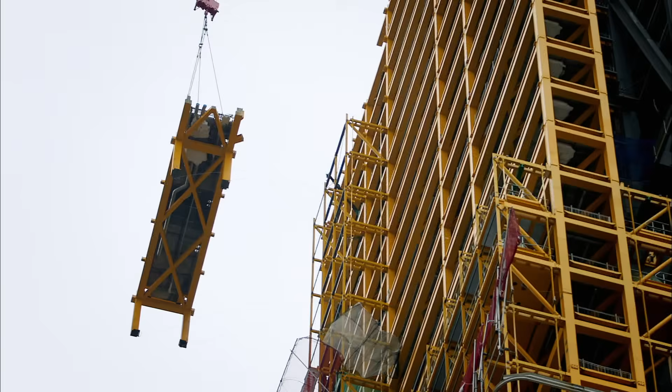In the heart of historic London, a brand new type of building is taking shape. A unique set of challenges has given rise to a world first. A prefabricated skyscraper, assembled by a tiny crew in an impossibly small space. On a super-fast schedule where every hour is accounted for months into the future.

Nothing like this has ever been attempted, but if they can pull it off, it could change the way we build forever. This is the inside story of the world's most cutting-edge and ambitious construction project. It is the Leadenhall Building, and it is a super skyscraper.

London has been building high-rises for almost 1,000 years. It began in 1066 with the Tower of London, built to intimidate the locals. It rose 90 feet and became Britain's first multi-story stone structure. St. Paul's, at least the fourth cathedral to stand on this site, reached 365 feet, more than 3 centuries ago.

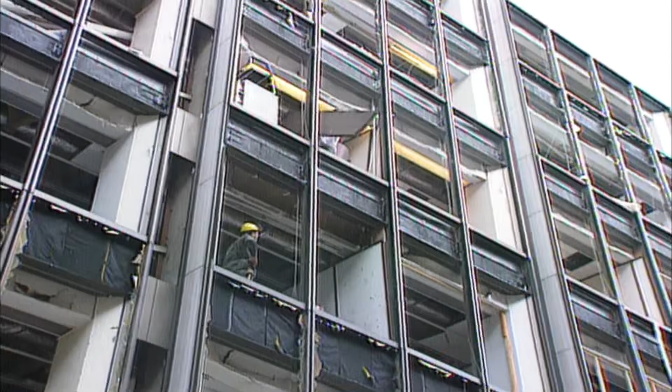The city has always understood high-rise and always understood that high-rise was the way of showing your strength and your success by marking your skyline. After the air raids of the Second World War and terrorist attacks in the 1980s and 90s, which caused more than $1 billion worth of damage, as well as through successive financial booms, which each produced their own monuments, London has seen a constant cycle of construction, demolition, and reconstruction.

The greatest constant in London's history has been change. As Chief Planner for the City of London, I'm responsible for 2,000 years of history. This is the point where people have been trading for 2,000 years. I expect it to be the point where they will be trading for another 2,000.

Now, a new kind of skyscraper is rising. The Leadenhall Building. Its distinctive triangular shape has already earned it a nickname: the cheese grater. The people behind it believe it will change the way we build.

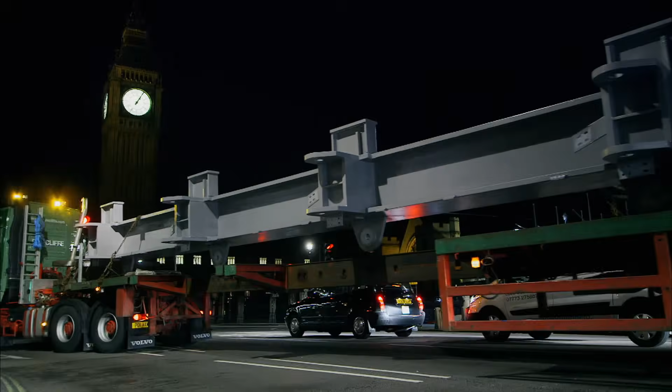It's 2 a.m. on a Friday morning in May 2012. While the city sleeps, 2 gigantic trucks make their way through the streets of London. They're carrying pieces of steel, 90 feet long and weighing more than 40 tons each. They travel by night, otherwise they'd bring daytime traffic to a standstill.

We've got 2 long heavy columns that have come under special transport movement order by the police. We're running late because the police didn't pick them up till, I think, 1:30, 1:45. When in position, these supersized pieces of steel will become part of a unique structure. London's newest skyscraper, the Leadenhall Building.

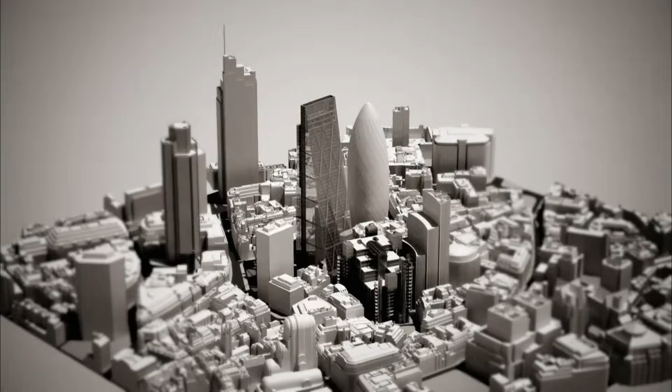736 feet tall, 52 stories. It will wrap a 20,000-ton steel frame in 75,000 square feet of glass. The Leadenhall Building won't break any height records, but what makes it unique is the revolutionary way it's being built. Prefabricated off-site and assembled in the tightest of spaces. It's a totally new way of building big.

The construction site is right in the heart of cramped, historic London, and that's what gives the builders their greatest challenge. The area they have to work in is tiny, just 10 feet wider than the building's footprint. If these columns don't go up tonight, there's nowhere to store them. It's a London job. You're a foot from the buildings like that, so you're building out of your boots, as I call it. But yeah, you'd normally have perhaps a bit more room.

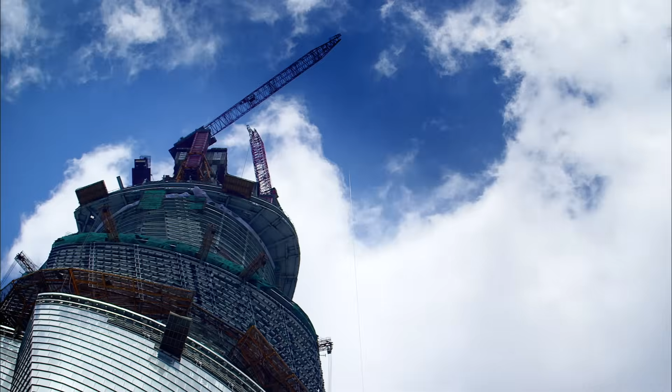What this means is that the Leadenhall Building can't be built like other skyscrapers. In the last 30 years, most tall buildings have been constructed using a concrete core. It's a design that produces great stability, but it also demands a serious amount of space. That's space to mix on site or accommodate a fleet of concrete trucks, and space for a massive workforce. Since at Leadenhall, none of that is possible, the building's designers hit upon two groundbreaking ideas.

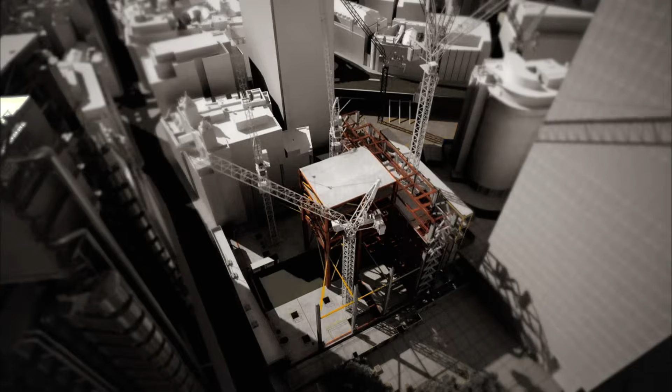The first requires getting rid of the concrete and replacing it with steel. The only concrete you'll find in the Leadenhall Building is in the floors. Instead of having a massive central core, they planned a steel exoskeleton that would sit outside the building.

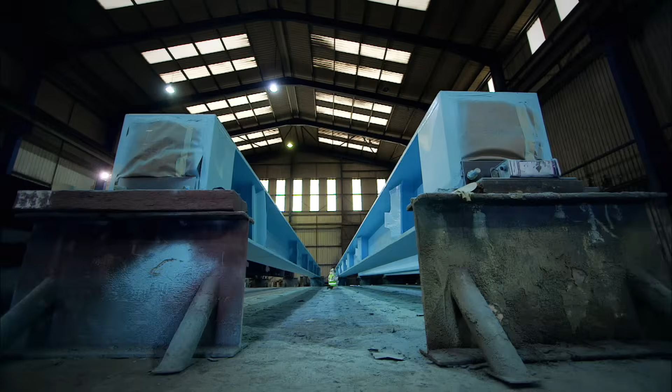The second space-saving idea is that all the work on this steel frame will be done not in London, but 200 miles away in the north of England. Here, mighty columns and beams are folded and pressed to withstand enormous stress. Next, the steelwork is passed on to another factory, where it's sandblasted, primed, and fireproofed. Then, it's stockpiled until the exact moment it is required on site, when all that's left to do is to bolt it into place. It's not construction, it's some assembly required on a monumental scale.

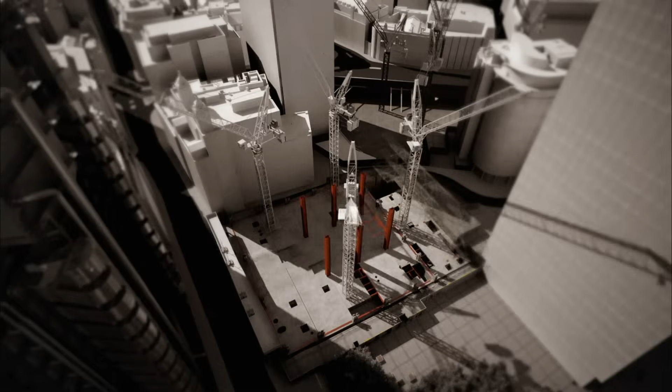The engineers are so confident in their new way of building that they've agreed to what seems like an impossible deadline. Work started in October 2011, and they committed to getting it up and running, power on, before the end of 2013. Just 26 months. In skyscraper terms, that's a sprint.

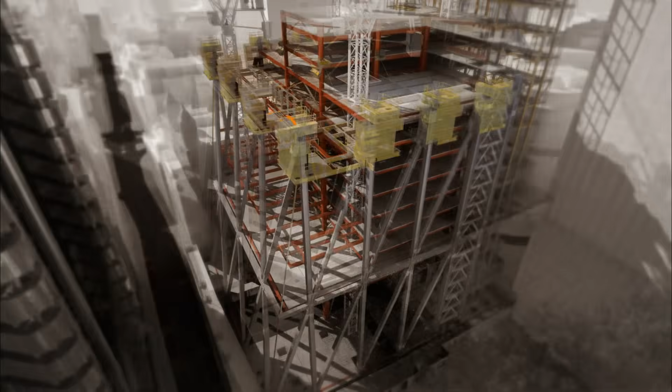But one tiny delay and the whole production line is thrown out of sync. In the long term, delays have massive financial implications. The Leadenhall Building's first paying tenants already have a moving-in date. The project is a joint venture between two of the world's biggest investment companies. They intend to lease out floor space and want the building open, making money as soon as possible. For every day lost, someone will have to pay damages.

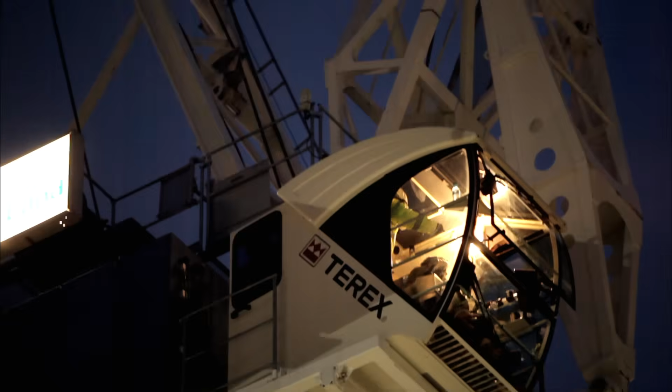But right now, there are more immediate problems. These adjacent buildings start taking deliveries, and from 4 a.m., which is past that now, they will start coming in. It's cutting it fine, but we're committed now, so we've got to keep going. The column is meant to be going up 5 stories. But without explanation, the crane's emergency brake has kicked in. Until the column is in position, nothing else can happen on site.

There's an issue with the crane. We're trying to find out what it is now with the hoist brake of the crane. It jumped a couple of times, so it's just playing a bit of a waiting game at the minute. Not 100% sure what the problem is, but we're not good to go until somebody has a look at the hoist brake of the crane.

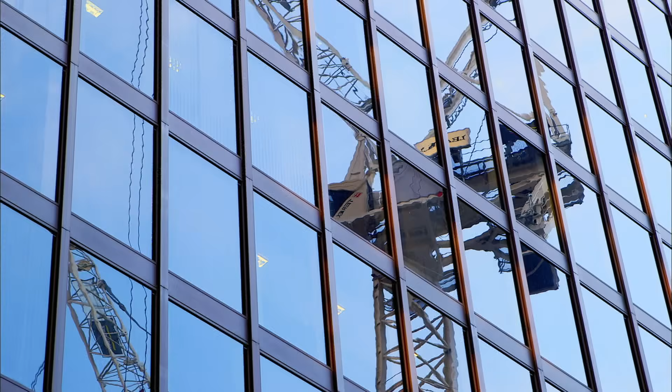The crane is brand new, and its onboard computer thinks the column is over its safe working limit. And that's not something that Paul or his crew can solve. Paul's got no choice but to call the manufacturers for assistance. And they're 800 miles away, in Italy. It's now 7 a.m., and the day shift workers are starting to arrive on site. After a reset of the computer, they can take another shot at getting the columns in place.

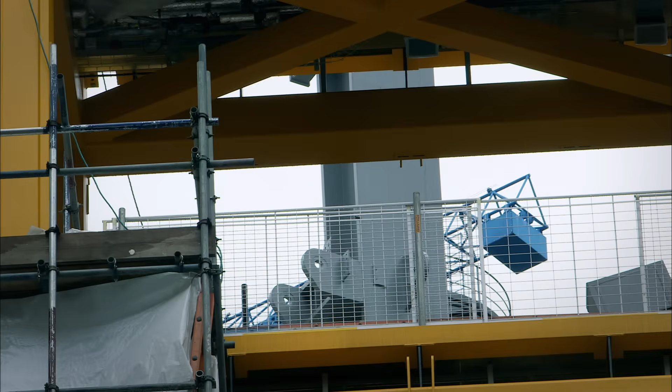Finally, they have success, but it comes almost 8 hours late. It's a delay they can't afford. With workers ready and waiting to floor and glaze the structure, the domino effects can be far-reaching and costly. If they miss deadlines, the penalties will run into hundreds of thousands of dollars a week. And there's only 11,000 more pieces to go.

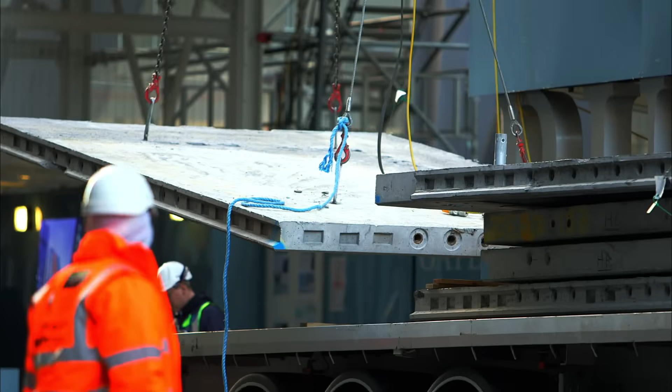By September, the structure is approaching the halfway mark. Today, they're starting to add flooring to the 19th level of the building's 52 stories. On a different build, you'd expect to see hundreds of workers pouring and smoothing concrete floors, with convoys of concrete trucks coming and going. But not at Leadenhall. It's concrete planks. It's the floors, basically. We've put thousands of these in. It's basically a big jigsaw puzzle. They just fill the gaps in. One shift of lads puts the steel in, the other lot of lads come along and put the concrete slabs in.

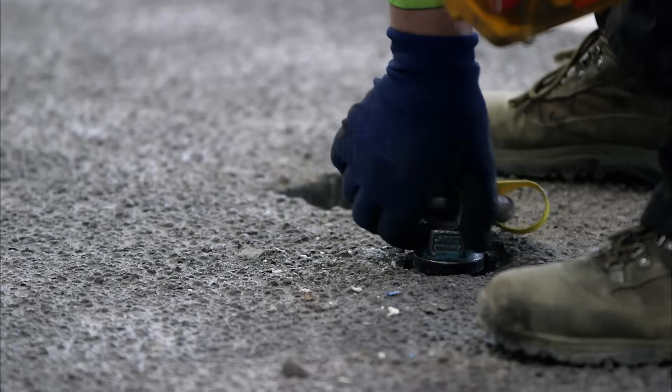Like almost everything else on this project, the floors are made off-site and delivered ready to be dropped into place. This $150 million plant was developed especially for the Leadenhall project. It may be the closest that pouring concrete ever gets to being cool. Basically, it's the future of the construction industry, and off-site manufacturing is the one thing where we can make that massive change. They know that their floor is already made, we've manufactured it, it's the correct quality, and they know that it will arrive on time to allow them to install it in their slot on site.

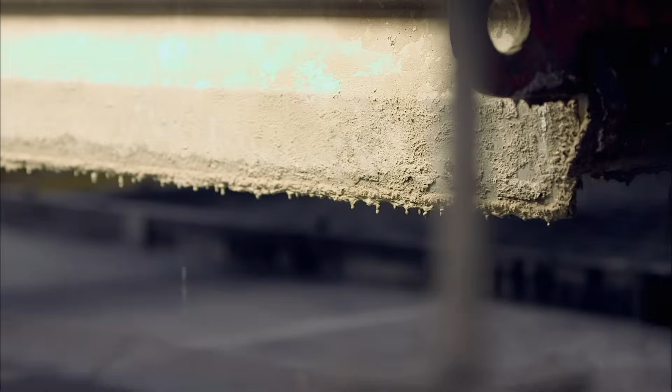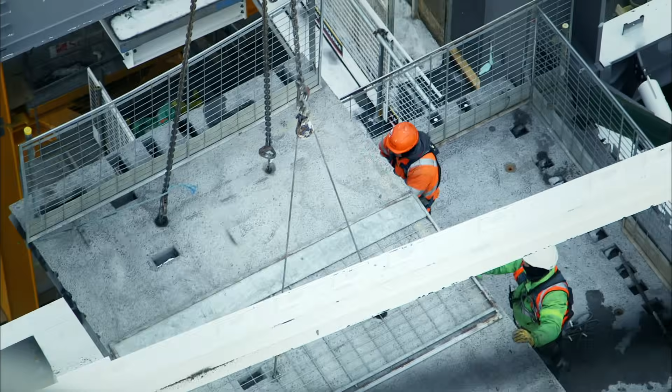The system only works with total precision, the right mix into the right mold, with gaps for all the utilities that will come later. Because things will happen fast when it gets to the site. Crane driver Christian Holliday and just 6 workers can complete an area nearly the size of 4 tennis courts in a single day. Pouring concrete on site would take 3 times as long and twice the manpower. By 10 a.m., Christian has laid 18 30-foot square floor slabs, weighing 2.5 tons each. To stay on target, he must lay a further 54 by the end of his shift. That's 1 every 10 minutes.

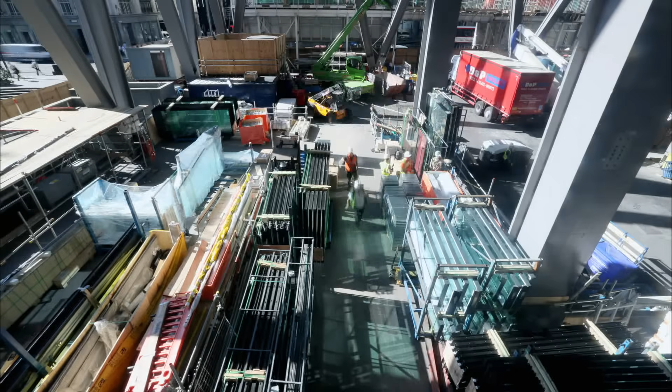Overseeing the work is 28-year-old project engineer Carl Wilkinson. It's his responsibility to ensure work doesn't fall behind schedule. We have no logistics space here, so we have to work on a just-in-time delivery basis. Just in time means nearly too late. It would be impossible to coordinate the delivery and installation of hundreds of thousands of components using conventional 2D plans. So, instead, they've created a 3D model of the entire structure, accurate down to the last bolt.

We've spent a lot of time in the 3D environment making sure that when things come to site, we've got that assurity that it all fits together and that it all works, and make the actual process on site as efficient as possible. We refer to it as digital engineering. Digital engineering for me really is a future for construction.

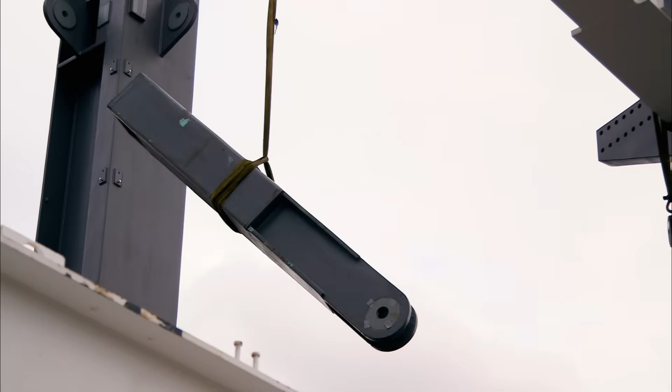Every delivery, every crane lift, every beam, bolt, and cable fix has already been given a time slot. They've run the complete simulation and built the Leadenhall Building in a virtual world 37 times. But they only get one chance to build it for real.

It's fundamental to me that the works that are planned, that plan is followed. If I come in and these beams weren't here, or the bolts were missing at one end and it was on temporary pins, I'd have been going back and having to cancel deliveries that are already parked outside and then having to reschedule the works, and then you lose a day.

This steelwork was all erected last night. The concrete planks are here now, so within a 24-hour shift, we'll have erected 2 stories of steelwork and we'll have a full floor plate complete. So we have to make sure the planning is absolutely perfect, so that as one trade is finishing, the next one is having their materials delivered, so you don't have any downtime in the actual craneage.

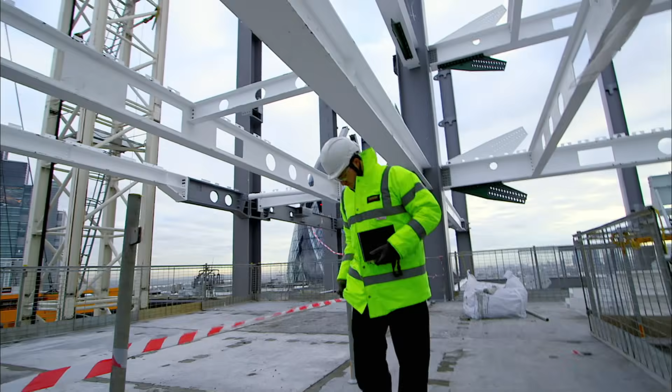It's an absolute obsession to look at the way the cranes are actually working. I dream about the cranes when I'm not at work. For Carl, this is a career-defining job. He's never worked on anything this complex or expensive. He lives with the knowledge that a week's delay might cost his employers hundreds of thousands of dollars.

And when he sees any deviation from the plan, he jumps on it. That crane right now shouldn't be doing that operation, so it means a heated phone call in about 5 seconds. Jerry, I'm just up here though. TC3 is on the K braces. I know, we don't have any delays on that crane, mate.

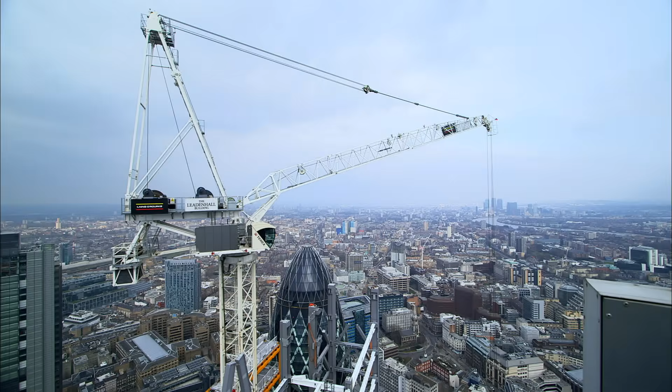Working in a glass box an 1/8 of a mile in the air is not for everybody. Yeah, I wouldn't like to be up that crane. If you climb up the crane, you get seasick. It sways all over the place, horrible. This crane was built especially for the Leadenhall project. Operating it requires a steady hand and a steady nerve.

No, the crane moves quite a lot. If it didn't, it'd probably just snap off. It's just basically a big fishing rod. So you don't make these too comfortable, otherwise you'd probably want to go to sleep.

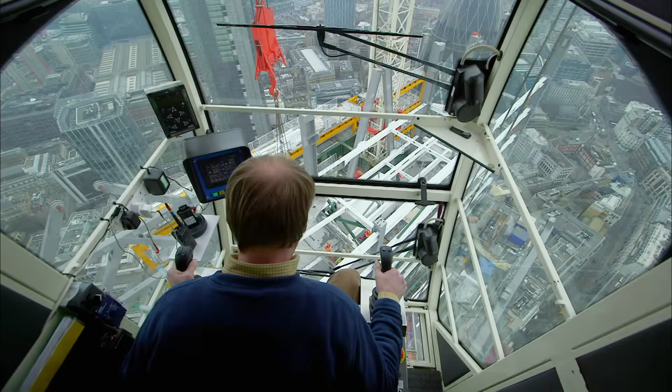Christian has hit his 72 slab target for the day. The Leadenhall Building is now floored up to level 20. But to finish the job on time and on budget, he must continue at this pace for the next 7 months. It's in. As the new year arrives, the steelwork has climbed up past its neighbors to the 40th floor. Locals can't mistake the distinctive form for anything else. They call it the cheese grater.

But its unusual shape is not just the whim of some architect. Building in London means adhering to some of the toughest planning regulations in the world. The higher you want to go, the harder it is to get permission. With a skyscraper, one concern trumps all the others: protecting the view of London's most important landmark, St. Paul's Cathedral.

Rising from the ashes of the Great Fire of 1666, St. Paul's is the beating heart of London. It was the venue for Admiral Lord Nelson's funeral and Charles and Diana's wedding. During the Blitz in World War II, Winston Churchill ordered fire brigades to save it before any other building, because to lose it would destroy Britain's morale.

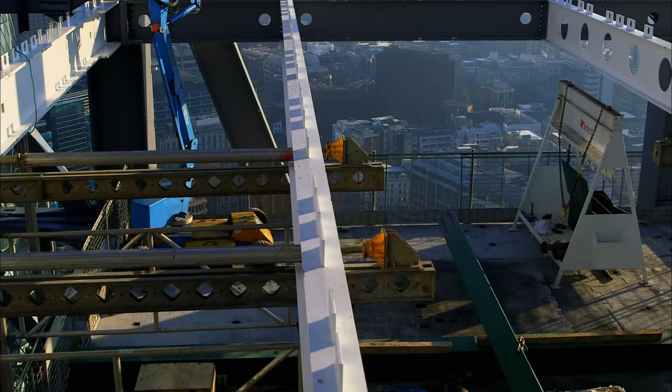The wedge shape means that as the Leadenhall Building goes up, each floor becomes smaller. It's the raison d'etre for the lean, but that gave us then the other design solutions to solve. And in an industry where the higher the floor, the more valuable it is, owners of a skyscraper want more floor space, not less. We've approximately calculated that usable space was about 350,000 square feet. And they said, well, to be honest, the figure has to begin with a 6.

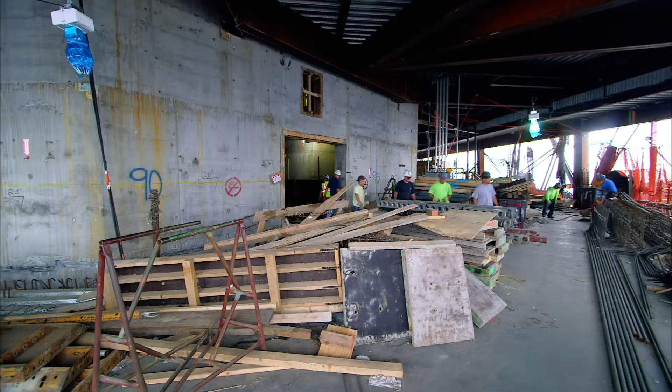The solution the architects hit upon is the key feature that makes this building design unique. To maximize efficiency, everything that isn't rentable floor space will be housed in a separate structure. A conventional skyscraper puts all its services, elevators, restrooms, and all the mechanical and electrical systems at the center of the building, where it takes up rentable floor space. In the Leadenhall Building, it's all moved to the back and packed into an ultra-efficient external spine, the North Core.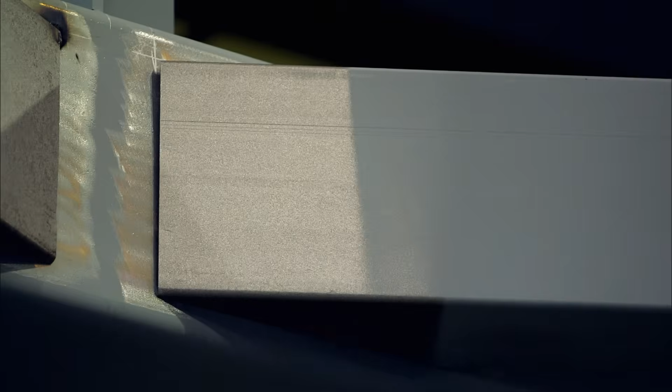What's really smart about how the North Core is being built is that each table comes to the site fully loaded with pipework, electrics, plumbing, and floor plates. That means it can go up in record time. So just all the time taking pressure off the construction site and taking pressure off the logistics. The table units are manufactured to precise specifications in Northern Ireland. To keep up with the relentless schedule, they need to be 100% certain each component will slot exactly into position once it arrives on site.

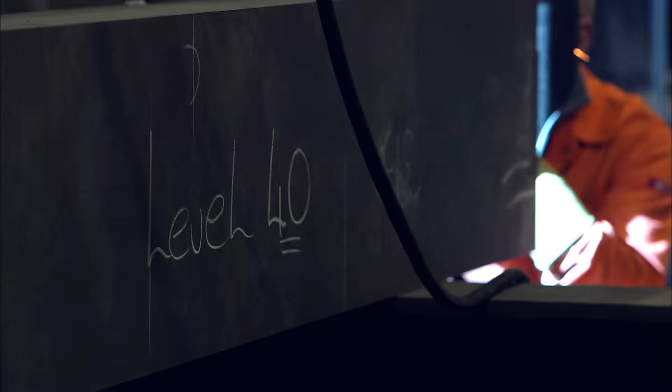The production line process is familiar, but here, no one has ever had to manufacture anything this big or this complex before. We've had to change our techniques quite a lot, from cutting, drilling, fabrication, final assembly. For us, we've got to make sure it's absolutely perfect. Every weld is absolutely consistently the same. Normally, a skyscraper's structural steelwork is hidden. But the designers are so proud of this innovation that they've ordered each table to be sprayed a vivid shade of yellow so everyone can see it.

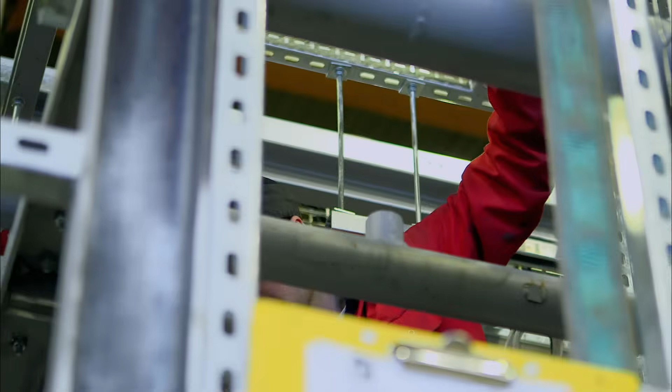As soon as the paint's dry, it's rushed across the Irish Sea to central England to be fitted out. If you just look and you see how tight it is between each surface, how they're so compact. You can obviously see electrical containment, hot water, cold water, cooling water, chilled, sprinkler systems, electrical systems.

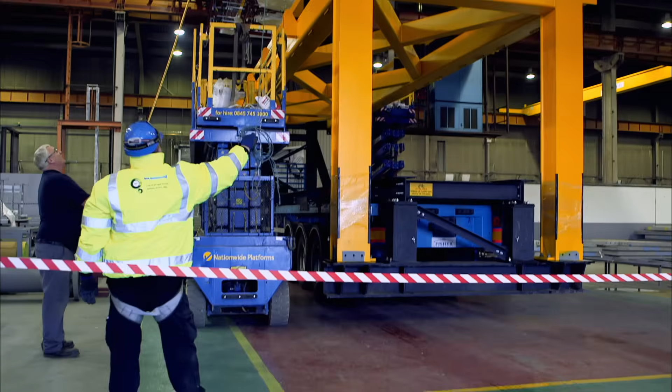Designing and manufacturing something this sophisticated is an enormous challenge. But if forced to build this structure by conventional means, in the cramped, congested streets of London, meeting their deadline would be impossible. If you had done this in a traditional build, they would have to get all these materials, piece by piece, to the site. 24 hours after landing from Northern Ireland, the table has everything it needs to be plugged straight into the building.

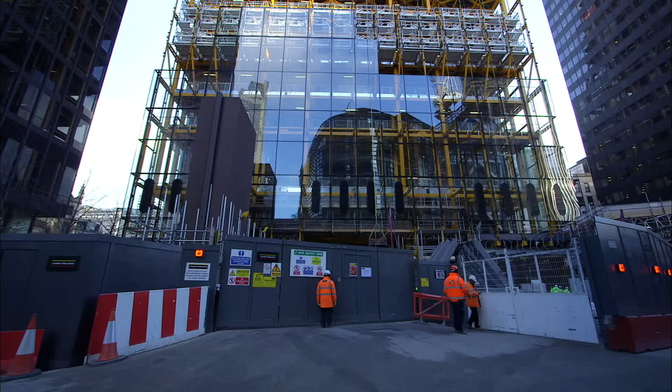March 2013. The Leadenhall Building is at 551 feet, 3/4 of its final 736-foot height. It's just 1 year since the very first North Core table arrived on site. In that time, a team of 24 people has assembled this: 41 floors of prefabricated modules. There are just 18 tables left to fit.

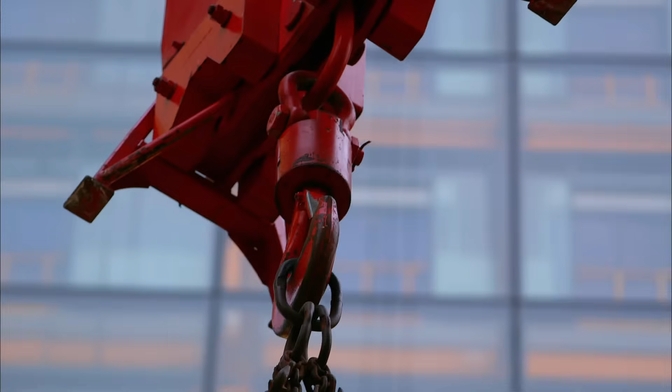Christian Holliday, the day shift crane operator, begins his daily commute. He needs to be in position, ready to lift, the moment the delivery trucks pull in. Otherwise, a carefully choreographed plan starts to unravel. Where do you want me? Up you come. Working at a height of 650 feet, it's now down to Christian to maneuver this 42-ton table into its final position with fraction of an inch precision. The problem is, he's working blind. I can't see what's going on down there.

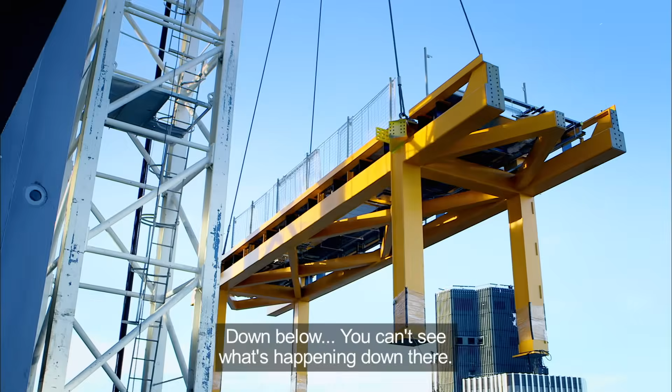Directing Christian from level 41, 120 feet below, is his banksman, Jamie Parry. You just rely on the banksman. Basically, they are your eyes when you're blind. So without them, you couldn't operate. Down below, you can't see what's happening down there. Keep Jimmy back, mate. Keep Jimmy back. Keep coming, mate. Keep it coming. He just talks to me constantly. If he stops talking to me now, I stop lifting.

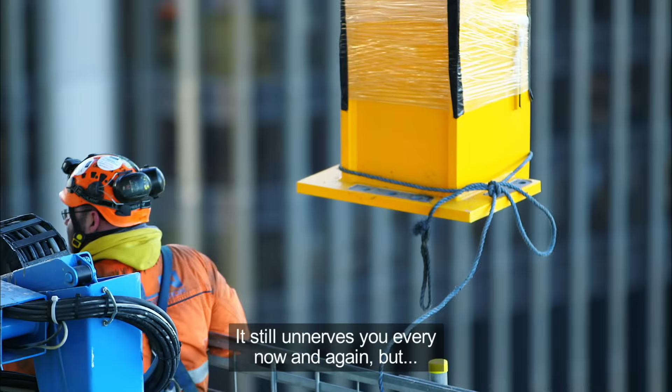It gets a bit hair-raising some days if it's wet. The steel can be a bit slippy. It's not for everybody, let's say. A lot of people, I'll go home, talk to my friends, and they'll say, "Not a chance." But I go up there. It still unnerves you every now and again, but it's what we do. So just don't look down.

Working blind at such extreme heights leaves no room for error. Every load, every lift, you've got to concentrate, otherwise you can hurt somebody quite easily. You know, it's a responsible job. If I make a wrong move, then somebody's going to get hurt. Drop your head a touch as you come down there, mate.

Faced with the narrowest of time slots and the smallest of spaces in which to maneuver. Tight fit. Keep it coming. Everyone is counting on this massive piece of steel. Ease that down. Ease that down. Slotting right into place. It's in. Back down for another.

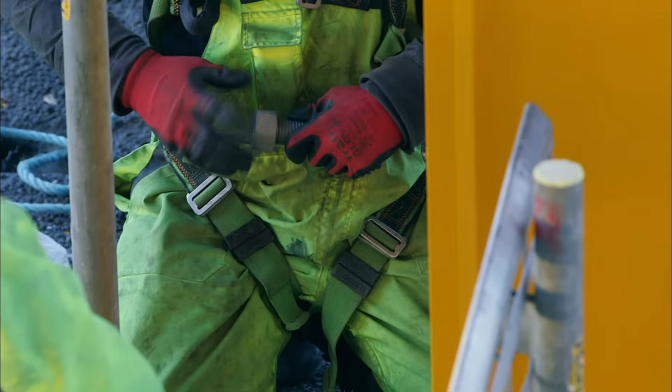Securing the tables couldn't be simpler or faster. The basic tool we use is our podger. We line the holes up with this, push it through, and then we'll pop a bolt in. So it keeps my finger end safe, that does. No concrete pouring, no welding. All it takes is a handful of bolts and the 42-ton table is locked into position.

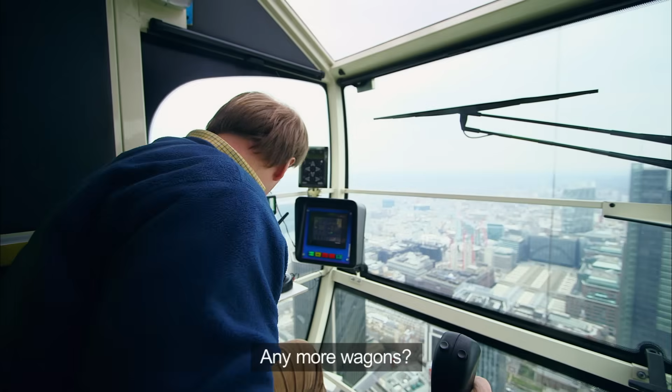And since each North Core level is comprised of just 3 tables, working at top speed, the team can install a full level in a single day. Any more wagons? 2 more, buddy. Well, get them in. They push on into the night. They're committed to a delivery date and a schedule, which means that work must run 24/7.

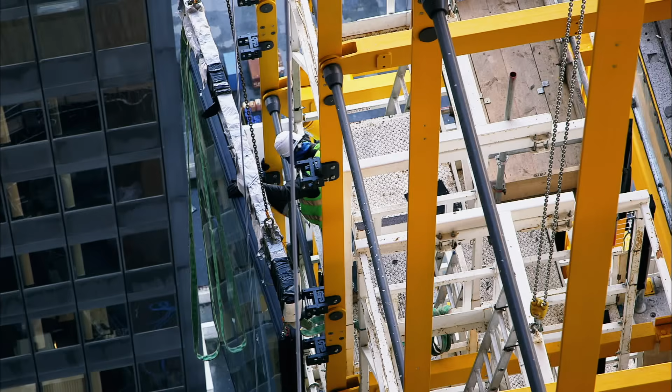By early May, the steel frame and precast floors are complete up to level 50. Just 2 floors to go until they reach the top. 2 cladding teams follow behind, transforming the Leadenhall Building from steel to glass. Traditionally, glass installation requires a large workforce and space for them to load and operate cranes. But because the North Core is already filled with services, there's no room to work like this. Once again, the unique nature of this structure has forced the engineers to innovate.

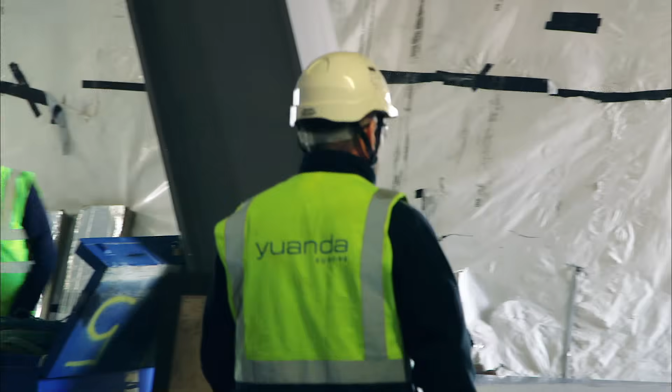Hi guys, how's it going? Okay? Yeah, good. The man in charge of cladding the North Core is Phil Sedge. Today, he's starting work on level 21. Phil's secret weapon is a revolutionary new system called Cerberus.

Cerberus is a self-raising platform with a monorail that can be quickly moved from floor to floor. Glass panels can then be delivered to the right level and slid around the building into position. It's a custom-made system designed just for the Leadenhall Building. Using Cerberus, Phil and a crew of just 30 can clad 2 floors in a week.

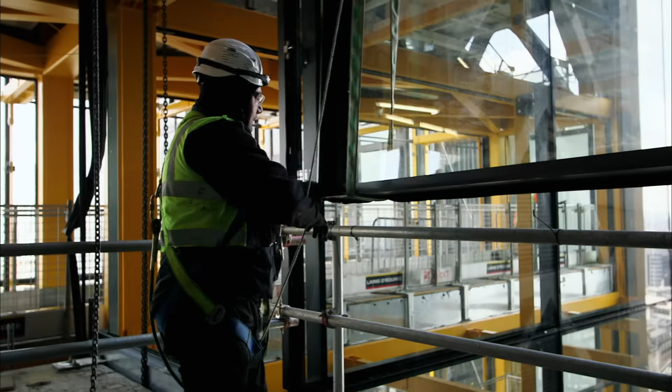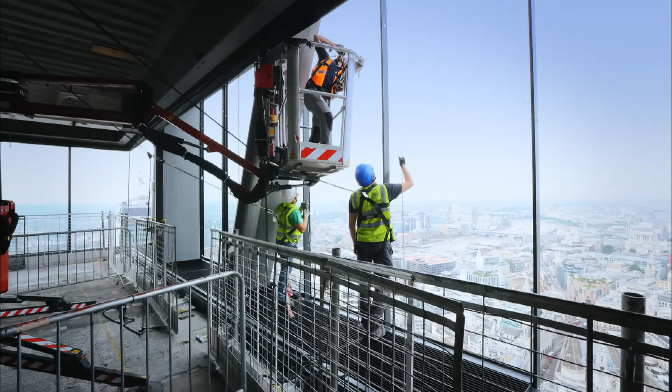On the sloping south side, using more traditional cladding methods, is Phil's younger brother, Andy. From the age of 16, I've worked with him. He's dragged me along. Without Cerberus to help them, Andy's team simply uses a hoist and manpower to maneuver their panels into place. The 2 brothers aren't just racing to meet a deadline. They're racing against each other.

We've both had and worked on many projects together. I think in all sibling rivalry, there'll always be a competitiveness now. I think my side of it is a lot more difficult than his. There's a lot more architectural elements, so I've got a lot more finishes to look at. Got a much more challenging system. It's a much more intricate system to install, so generally I think I've got the harder task.

The brothers have until August to finish adding 17 acres of glass to the Leadenhall Building. It remains to be seen who will reach the finish line first, Phil and Cerberus. Yesterday we managed to get 11 units in, so that was a pretty good day. Or Andy, sticking to the tried and tested method. They average about 20 a day for these external units. In the next 10 weeks, I believe we'll have a majority of the last sections of the office done. The race is on.

But despite the best laid plans, Andy and Phil are both at the mercy of something that can't be scheduled: the British weather. Wednesday, Thursday last week, we were probably hit with some of the highest winds we've had on this project since Christmas time. So we've lost a lot to bad weather and high winds. Anything over 20 miles per hour could easily catch the glass and smash it into the structure. Each panel is manufactured in China. Any replacement means a 6-week wait.

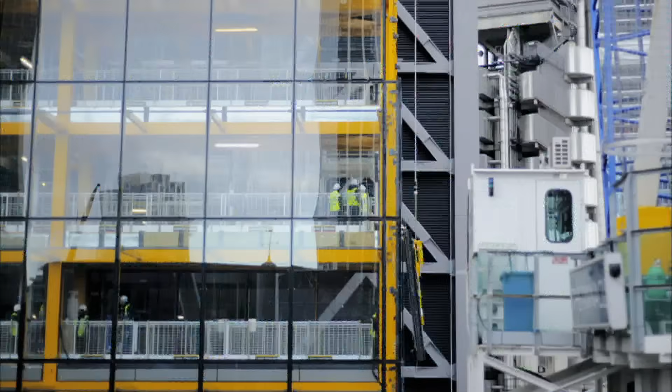We had a 22nd July target date to try and achieve, but we realised that's probably slipped a couple of weeks. And if you keep losing, it gets to a point where you can't creep back. The life here has been a lot of hours, very stressful. Unless Phil can find a way to get back on track, not only will he lose out to his little brother, but he's in danger of incurring huge financial penalties.

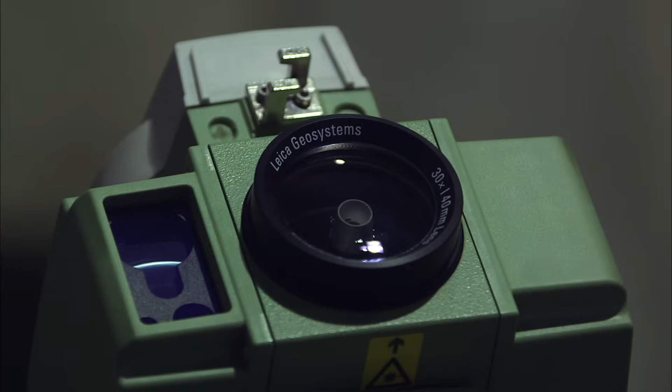It's now June. The framework is nearing completion, and the team has reached a critical phase in the construction process. For the past 12 months, surveyor Justin Carmichael has been tracking what in any other building would be a disturbing pattern. The top of the building is leaning over to the north. Every 5 to 6 weeks, we see about 2 millimeters of movement.

The North Core is an ingenious solution to the problem of space. But loading all the services onto one side has caused the whole building to move. It's an asymmetric building, so there's more load on the north side of the building than there is on the south, which means that the building is going to settle differently. The foundations are going to settle differently on the north and the south. So as the building gets taller, it gets heavier and leans further to the north.

Normally, this level of movement would be a horrifying design flaw. But here, these growing pains are not only accounted for, they were planned. It's all part of another world first that the engineers have called active alignment. We allow the building to move sideways, and we monitor very carefully how much it's moving sideways, and then we pull it back again, back to the south.

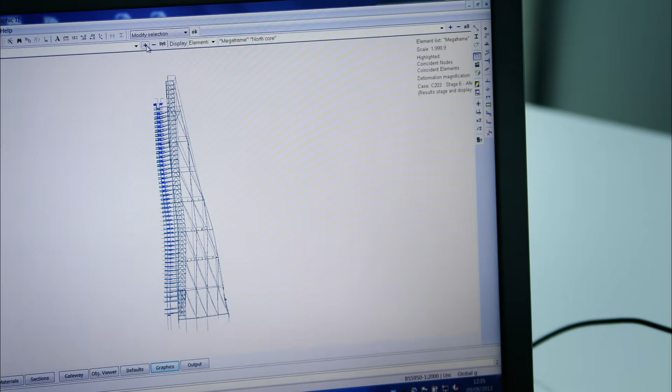The theory is that the Leadenhall Building's steel frame can be tightened up during the construction process. This will make it stand up straight. The building's steel frame, weighing 20,000 tons, is adjustable. So it's a very particular kind of approach. We're not aware of any other skyscrapers that have tried to do this. So far, it's only been tried in the lab, on a computer model.

Steel erector Carl Martin is about to put the theory to the test. Because nobody had done it before, we had to sort of start from scratch. So they lumbered me and said, "This is a good job for you." This extraordinary process is only possible because of the Leadenhall Building's unique structural frame.

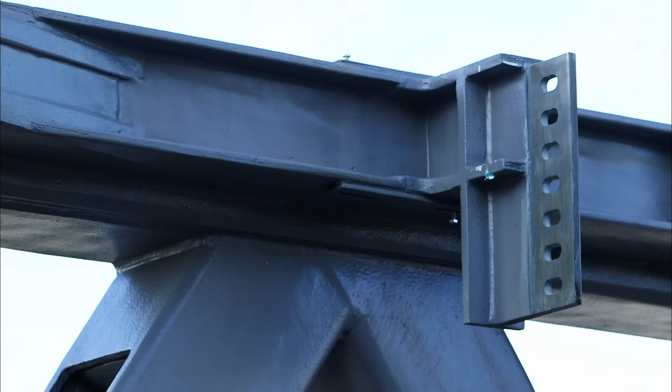To join vertical columns to horizontal beams and diagonal braces, the engineers designed 23-ton star-shaped pieces of steel known as nodes. When the building was erected, each of these joints was filled with a number of steel spacers called shims. By opening the joint, Carl should be able to remove the necessary number of shims and correct the building.

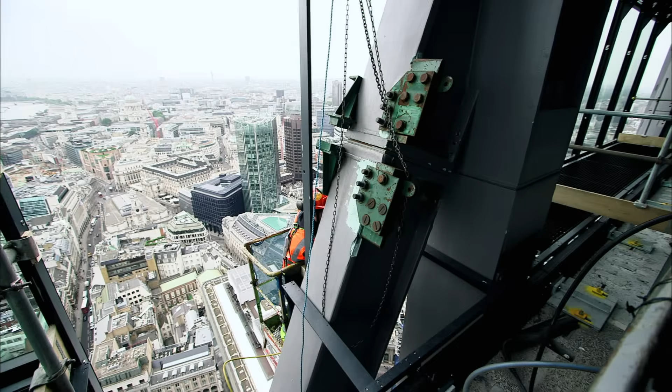First, Carl fits giant green clamps either side of the nodes. He places powerful jacks in each corner. Wind it down, lock it off. And inserts hydraulic pumps into each jack. It's the same principle as jacking up a car, except this is a 52-story skyscraper. If a pipe goes, then you've got the high-pressure hydraulic oil that's going to come out. I said, what happens if one of them breaks? Make a big mess.

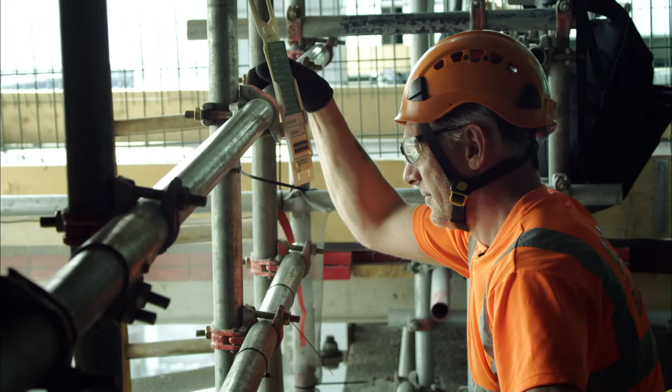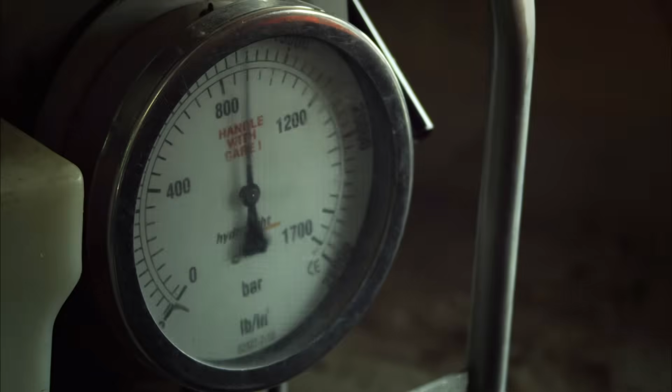The nuts on the megabolts are loosened. And then 500 psi of pressure is released into each jack. At first, nothing happens. The joint remains clamped shut. The pressure is increased. Still, nothing. We'll go flat out this time, hopefully. The pressure is cranked up again. Each jack is now exerting the equivalent of 220 tons of pressure. Finally, movement.

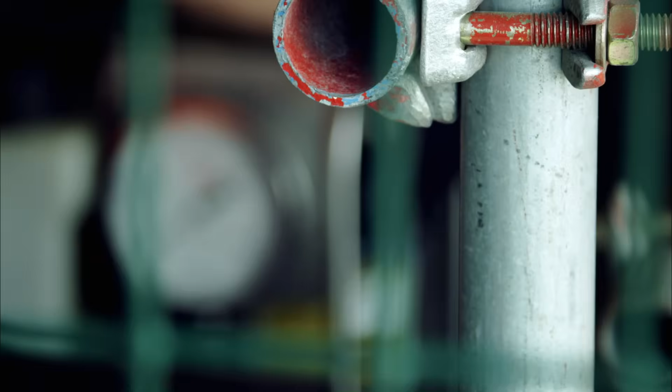The entire structure above this point is now being forced upwards, allowing the shims to be removed and this line of steel shortened. We took 9 today, but this is the third time. We took 7 last time and 8 the time before, so we've basically gone 24 mil. All that remains is to release the pressure and close the joints. By the time the building has settled into its new position, the top of the skyscraper has shifted to the south by almost 1 inch, bringing it into line with the floors below.

All the while, the cladding teams have raced against each other and their deadline. Their goal is to finish adding 12 acres of glass by August. For the past month, Phil's team on the North Core has battled unseasonably high winds. In that time, he's gone back to the drawing board and customized his new cladding system, Cerberus, to make it more resilient. And what we realised, because of the high winds that we've received recently, is that we've now put something in place that can hopefully deal with that with this tension wire system.

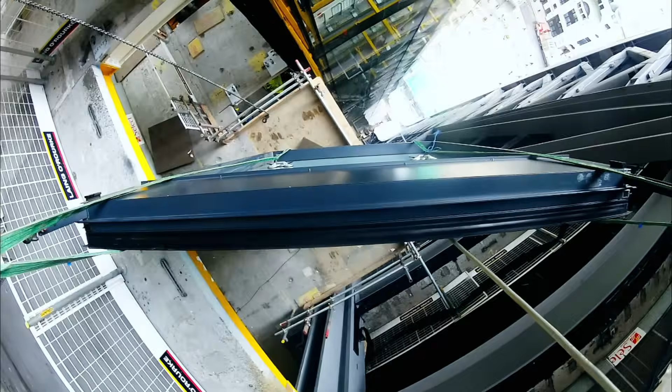No one's ever tried anything like this before, so there's a degree of trial and error involved before they get it right. As the units come out in the launch area, they'll actually get attached to those cables. They run on runners then, and then it can only move just a little bit in the wind. But that way we've reduced it from swaying and the actual manual labour of trying to hold the unit away from the building. By the time they've come back round, we've already gone up with the next unit.

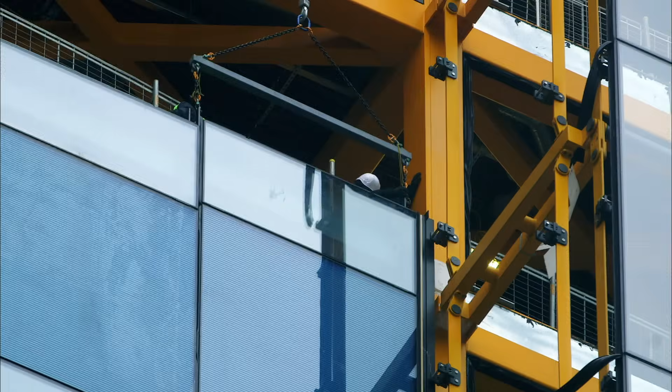You never know, maybe with this tension wire system we can try and gain something back, but there is a hell of a lot of work to get to that point in time. Phil's team now needs to work flat out to recover lost time. Keeping the pressure on, he's got younger brother Andy hot on his heels. I'm sure he'll keep chasing me right to the very end of the project. We're catching him up. We'll get there, I'm sure. I'll pip him to the post at the top.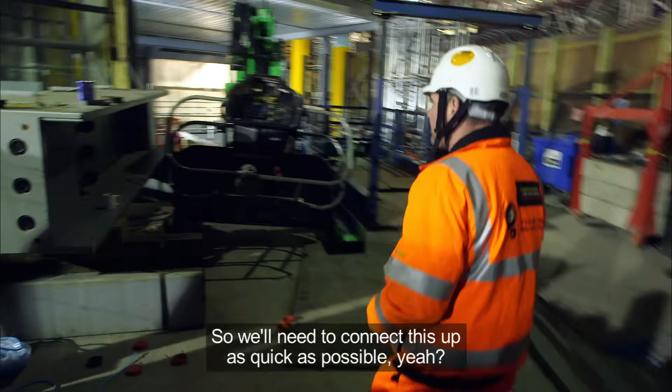2 weeks later, with the North and South cladding teams neck and neck at level 39, the final steel beam at the highest point of the building is about to be fitted. Yeah, we're going to start lifting the mega beam now, yeah? So we'll need to connect this up as quick as possible, yeah? Night shift manager Ormond Maxwell does the final checks. They're ready to lift now, yeah? The column's dressed, the beam's dressed. I'd say this operation should be complete within 3 hours. It's known as topping out and is the culmination of 17 months non-stop work.

The last beam of their 11,000-piece steel frame is too long. The beam we've planned to put in tonight don't fit. So we've got an engineer up top having a look at it to see why it doesn't fit, and hopefully they can rectify the problem. We'll get this in tonight by hook or by crook, there's no doubt about that. The boys will work through until that is fitted tonight. In the end, their only option is to pry open the gap and wedge in the last beam.

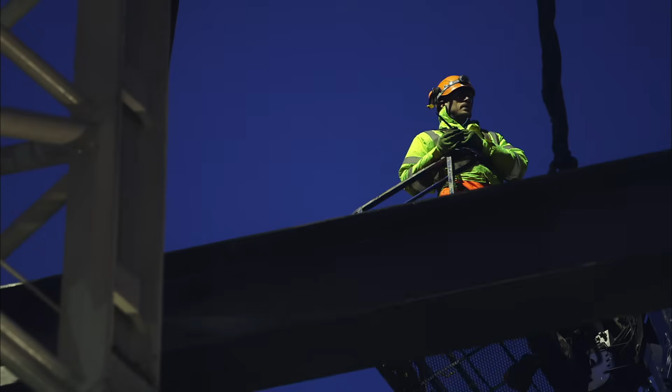This may be one of the world's most technologically advanced construction projects, but sometimes it just comes down to a little brute force. The topping out may not have gone quite as planned, but within hours, the crew is celebrating the official completion of the steel megaframe. It marks the start of a new phase in the building's construction.

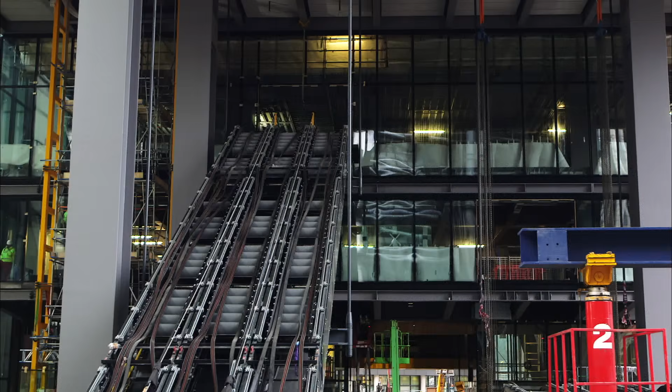My role has changed considerably. I've gone from being the project engineer in charge of the daily delivery of the structure to the planning and logistics manager, if you will, on the ground floor. So I've literally moved right from the top of the building to the bottom. Project engineer Carl has moved down to ground level to begin work on the Galleria, a show-stopping public space 5 stories high. The steel frame has meant that we don't have that central core, and so we've managed to free up this huge great space on the ground floor and really open up the whole building.

The job is coming to an end. You can see the finishing line. That final piece of steelwork going in sort of marked the handover between myself and Carl. So Carl's brought all the structure up from ground level, and it signals now the next stage of the build. On any other project, topping out is a milestone marking the end of major works. But the Leadenhall Building is not like other skyscrapers, and the most important part of their build is still to come.

Fitting out the top 4 floors of the tower. They'll contain all the mechanical and electrical services that make the building live and breathe. Normally, a building would put these systems at the very bottom, in the basement. But at Leadenhall, in the fight to maximize rentable floor space, they're going to cram heating equipment, cooling towers, chilling modules, generators, boilers, and control rooms into this space, right at the top. Everything must be slotted through a small hole left in the roof of the building. It's an ingenious idea, but incredibly tough to execute.

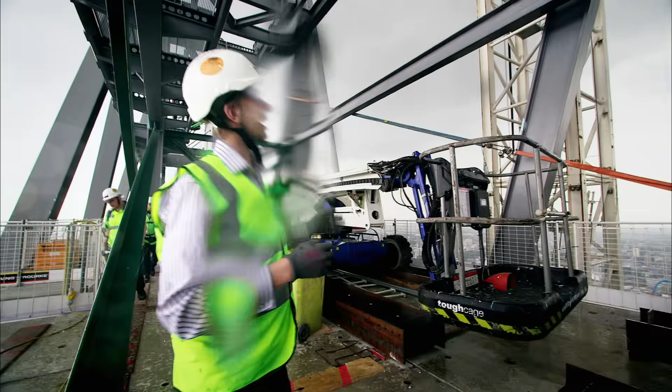It's going to be lifted up with the crane from the ground floor, and it's going to come in through this opening that you can see just here, lowered down onto level 49, and it's probably going to be one of the most challenging parts of the project. The issue is that up here, space is tight. The floors are just 1/4 the size of the ground level. Using 3D modeling, engineers tried 20 different configurations before working out how they could pack everything in.

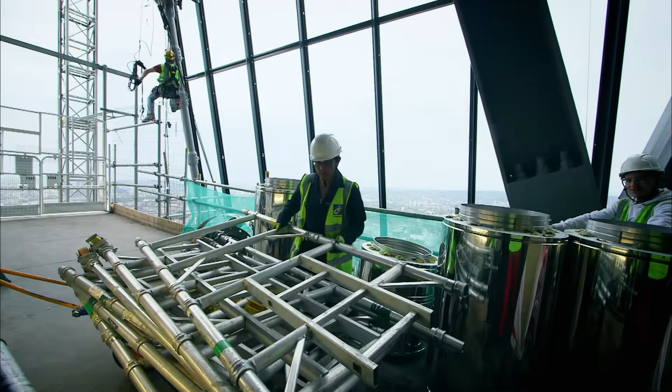As you can see, it's already tight for space. So once the cladding's installed and this is all enclosed, it's going to feel a lot smaller as well. So it's going to be extremely challenging space-wise to make sure we're getting things in the right sequence and they're moved into position, into their final position straight away. Without that 3D model, I don't think it would have been possible up here.

Since the steelwork took 3 months longer than anticipated, Nick needs the system's installation to go without a hitch. He's got to fit 25 units by November. The way the build's gone at the moment, the structure has overrun, so there is a reasonable amount of pressure now to try and get the fit out, the plant fit out, finished up at these levels. But nothing can happen until the cladding's done.

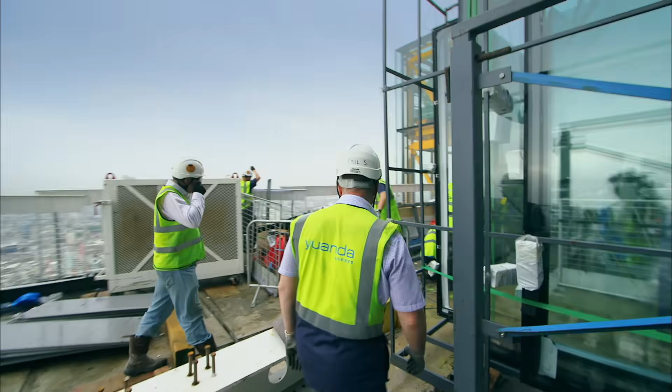On the floors below, all eyes are on the Sedge brothers. 11 months ago, they began a race to cover the Leadenhall Building with 75,000 square feet of glass. Older brother Phil is working on the North Core using the new monorail system Cerberus, while younger brother Andy is sticking with good old-fashioned manpower on the south side. They're approaching the newly built finish line, and it's clear who will be taking first place.

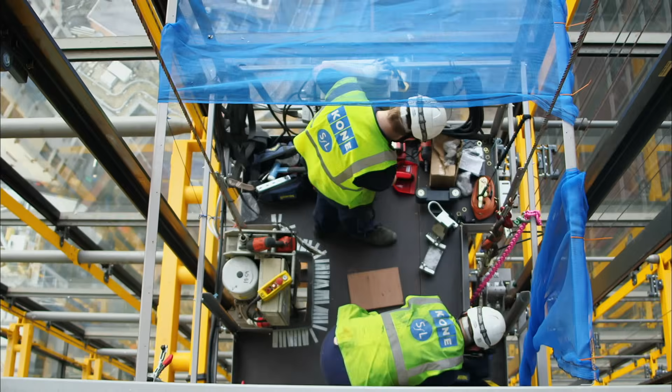Yeah, Phil's beating me. As you can see now, we've finished, got all the way up to the top on level 48, and it's all done now, so it's really good. Phil's pioneering new installation system, Cerberus, has boosted his team to the top. Andy knows that I always win. He's having to live with that, unfortunately. We're finished. It's a good achievement.

Andy still has 7 floors of glasswork to go. I'm on my last level of glass going in. I've got the internals to go in after that. But in regards to the works, yeah, I'm always going to say mine was probably a bit tougher.

August 2013. It's 23 months since the major building work began at Leadenhall. The steel frame is complete and standing up straight. All the floors have been laid and the cladding is finished. It means that it's time for the critical power systems to be installed on the topmost floors of the 736-foot tall tower. First up, one of 4 18-ton generators. It's a delicate operation. One small knock could damage the $1.4 million mechanism.

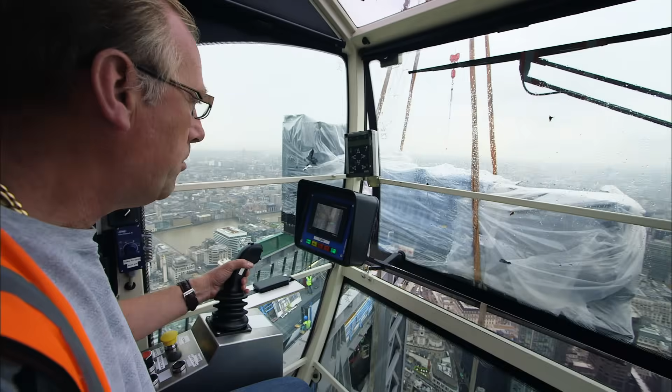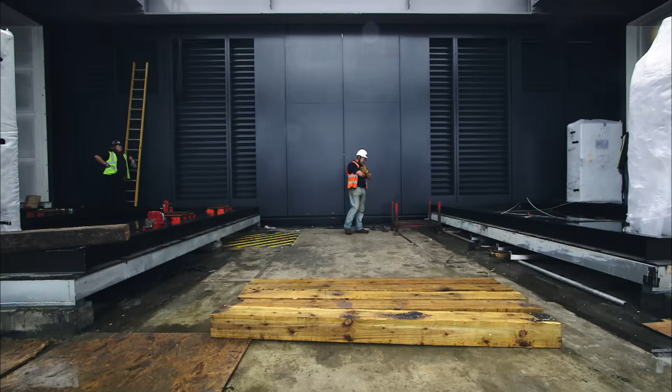I mean, you're taking this in 7 metres away from your cab window, and that's got to be about 12, 14 metres long, isn't it? So that's what worries you when it's windy, if it spins on you. Right, now we're going down through the letterbox from 51 down to 48. The hole we're going down is virtually the size of the machine, so we've got to take this real slow once we get through. You'll see a couple of lads down there are going to help us on the tag line. Once we get through the top here, Brian the banksman's going to take over for us.

Jimmy must slide the generator through a narrow slot that's been left in the attic's roof. Once we go through the top here, that hole narrows. As we go down, it gets narrower. So, I don't know if you can see from there, but you've only got inches coming. When you get down the next floor, literally the inches.

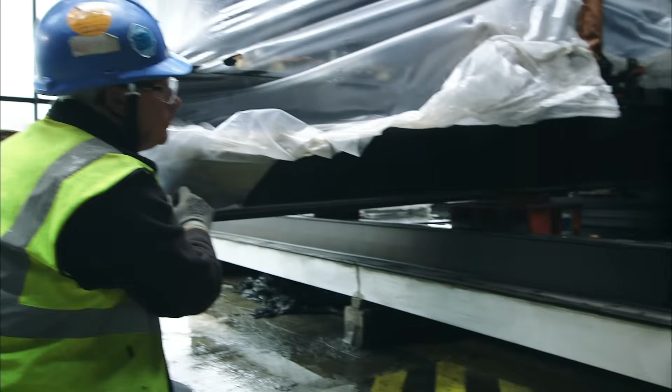Coming down. We're coming, Jim, down a little here. Keep it coming, Jim, keep it coming. Keep it coming, boy, keep coming down. Okay, keep touching onto the left. Just hitting up as you're going, Jim. Are you happy with us? You all right, Bassett? Yeah, happy with everything. Yeah, come down. Right, come down easy, Jim. Down you come. The first key piece is in. Now everything else must be positioned around it.

By following the detailed 3D model, Jimmy and the team install 4 floors of systems so fast that they are able to claw back the 3 months lost to the steelwork overrun. With all of the main systems installed, they're ready to plug into the power grid, flick the switch, and bring the Leadenhall building to life. Almost 40,000 components have been assembled in under 2 years. A European construction record for a building of this size.

The architects, engineers, and construction workers at the Leadenhall building have pushed the limits of what can be achieved in the smallest of spaces and tightest of schedules. When we've been engrossed in it as much as we have, it's very hard to stand back and see just what we've actually achieved over the last 2 years. And we really have achieved something very, very special in a very short period of time. It's an absolute celebration of engineering. In the heart of an ancient city, the building of the future has arrived. Right on schedule.